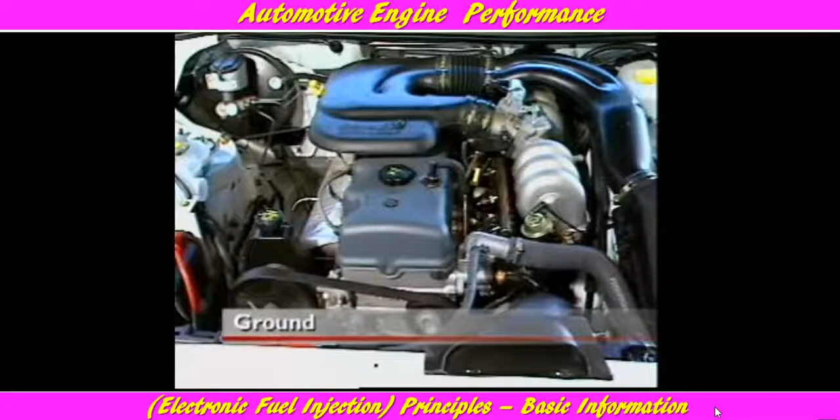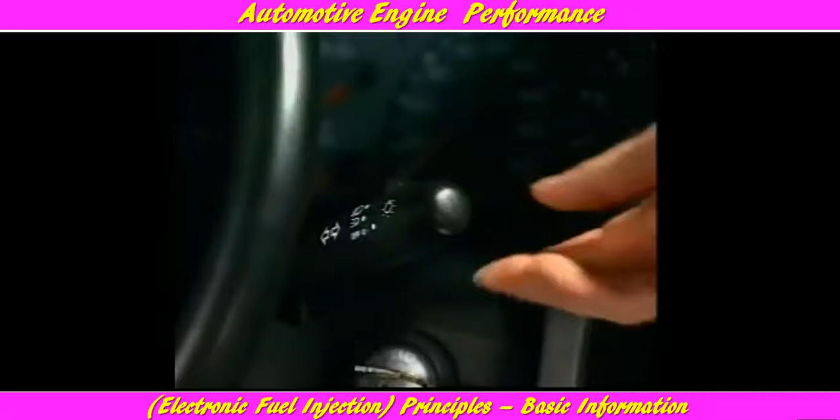Ground is a term used to indicate connecting a component to the vehicle frame or chassis. Current flows from the positive terminal of the battery through a controlling device such as a switch, then through the component. The return path is through the vehicle chassis or frame to complete the circuit and allow the component to operate. Using the vehicle frame in this way simplifies the circuit wiring.

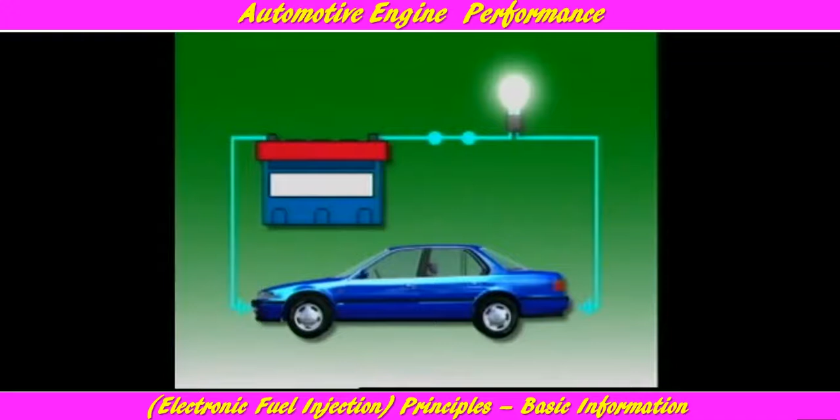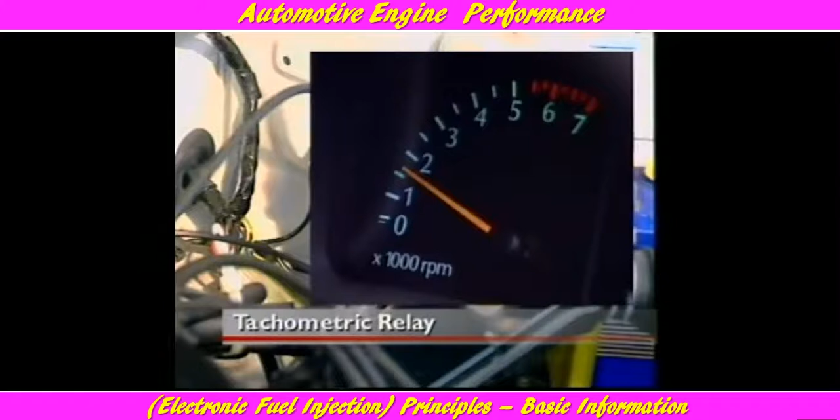A tachometer is used to indicate engine RPM. It is normally connected to the negative terminal of the ignition coil. The pulses from the ignition primary circuit are then used as an input to operate the tachometer. At idle speed, the frequency of the pulse is steady. As the engine speed rises, the frequency of the pulse increases as the tachometer indicates.

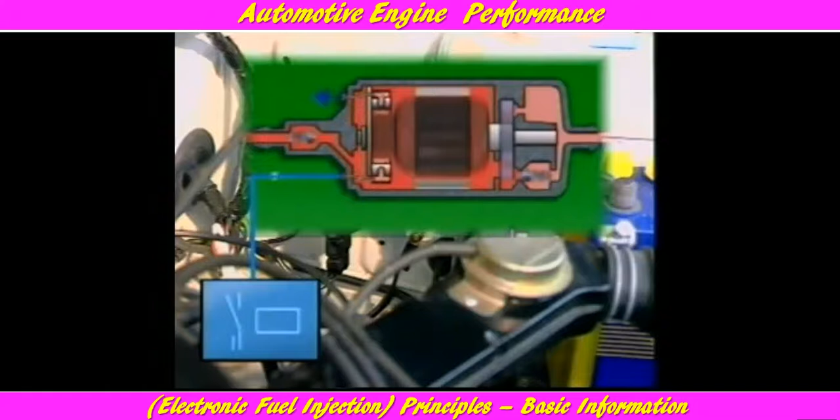A tachometric relay uses the same input from the negative side of the ignition coil to ensure the relay operates only when the engine speed is above a specified minimum, say 350 RPM. In this case, it operates as a safety device, ensuring the fuel pump operates only when the engine speed exceeds this figure.

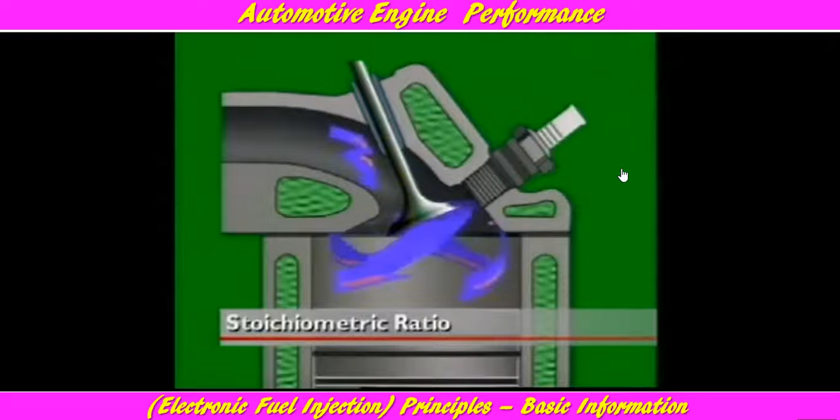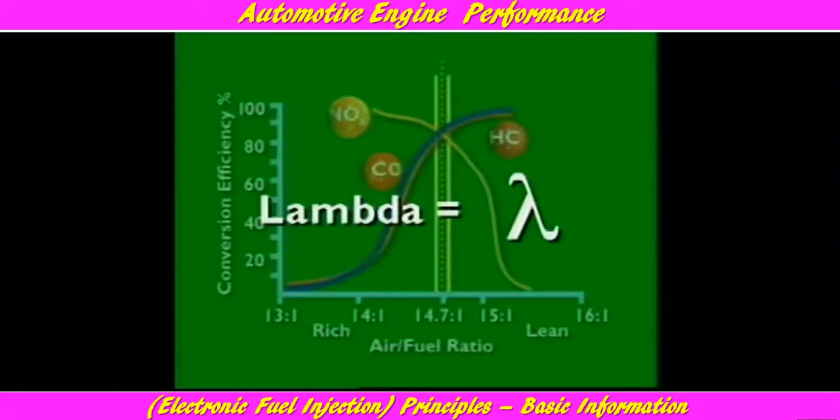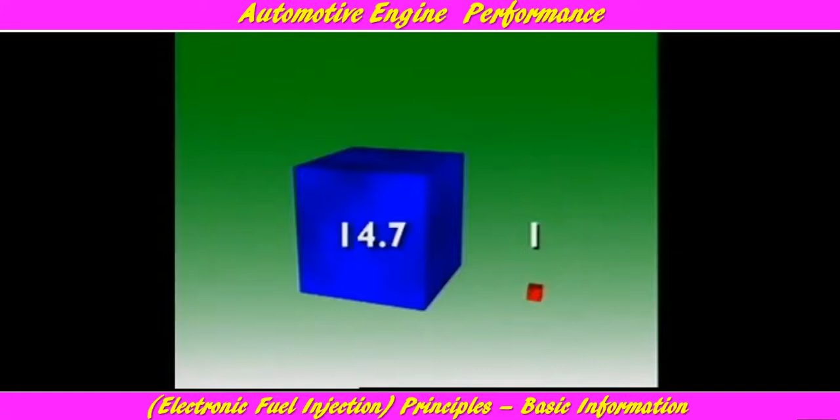The term stoichiometric ratio describes the chemically correct air-fuel ratio necessary to achieve complete combustion of the fuel. It is represented by the Greek letter lambda. The value of the ratio is 14.7 parts of air to 1 part of fuel. By mass, that's 14.7 kilograms of air to each kilogram of fuel. So if lambda equals 1, the air-fuel mixture is at the stoichiometric ratio of 14.7 to 1.

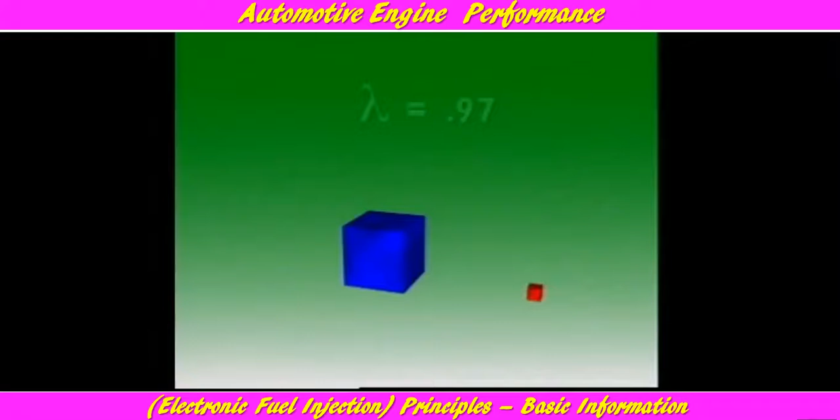If an air-fuel mixture has a higher figure, say 1.03, there is more air in proportion to the fuel than 14.7 to 1, and the mixture is slightly lean. A mixture with a lower lambda value has less air, proportionately, than fuel, and the mixture is slightly rich.

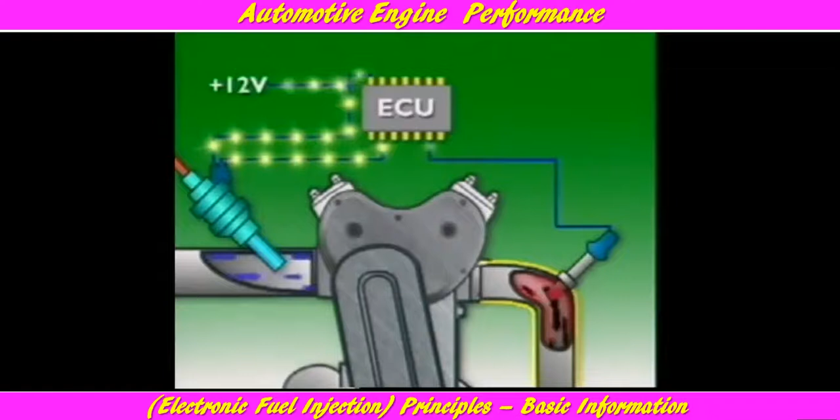The exhaust gas oxygen sensor is also called the lambda sensor, since it can be used to maintain the air-fuel ratio at lambda equal to 1, within very close limits. It can be installed in the exhaust manifold, where it measures the percentage of oxygen in the exhaust gases. A high percentage of oxygen may mean too little fuel is entering the engine, the mixture is too lean, and the lambda is greater than 1.

The sensor delivers this information to the ECU, which adjusts the mixture accordingly. Similarly, a low percentage of oxygen may indicate too much fuel is entering the engine, the mixture is too rich, and the lambda is less than 1.

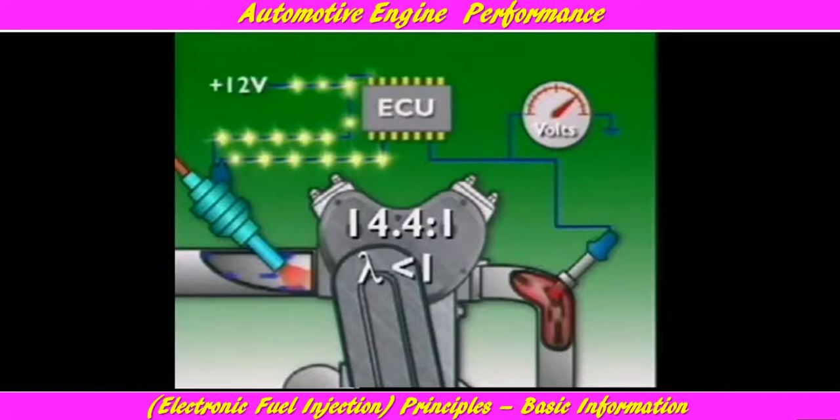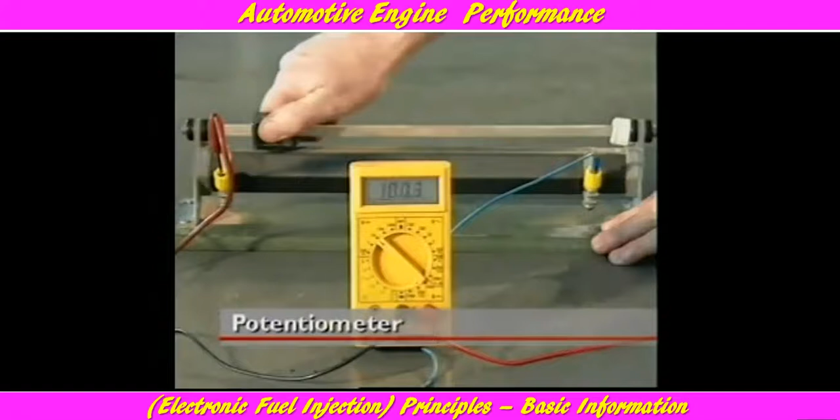A potentiometer is a mechanically variable resistor which, in EFI applications, is normally a film type. It can be linear or circular in construction and has 3 electrical connecting points. 2 are at the ends of the resistor and the third is attached to a center sliding contact, arranged to move across the resistor. A reference voltage is applied to the resistor so that a steady current flows through it.

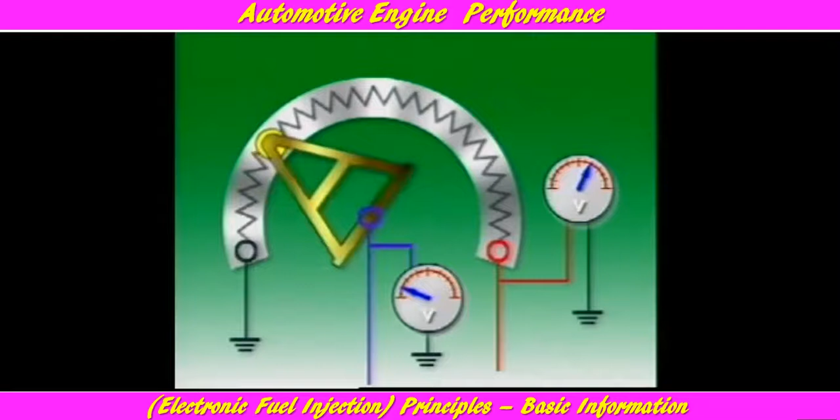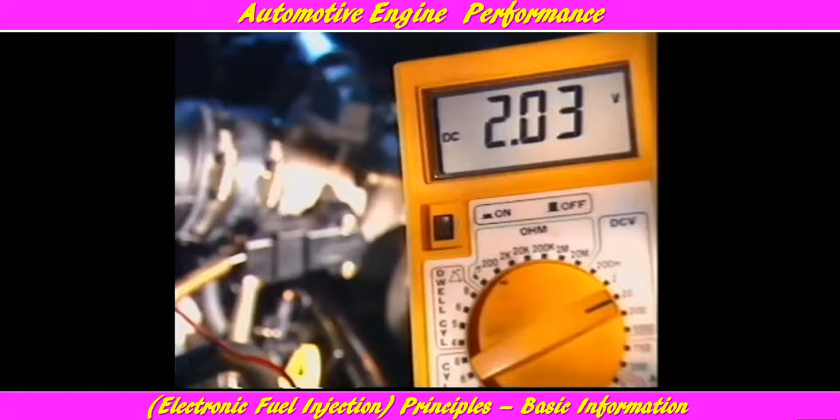As the center sliding contact moves across the resistor, it measures the voltage at the point it is in contact with, and provides a reference voltage for that position. In automotive applications, the circular form is commonly used as a throttle position sensor, with the center contact attached to the throttle plate. The throttle plate position can then be monitored by the control unit.

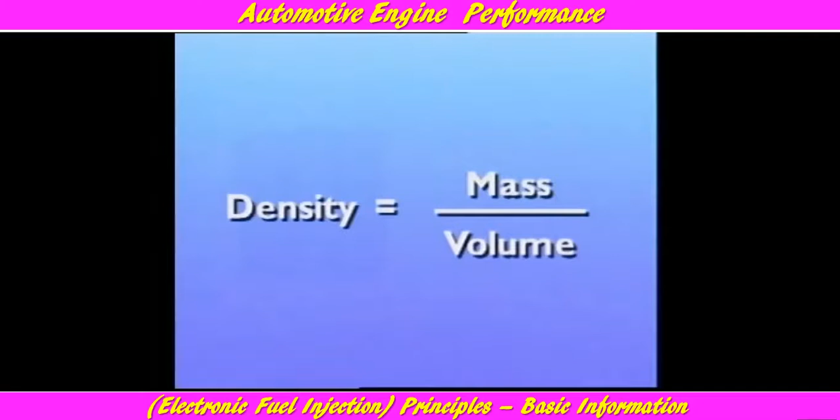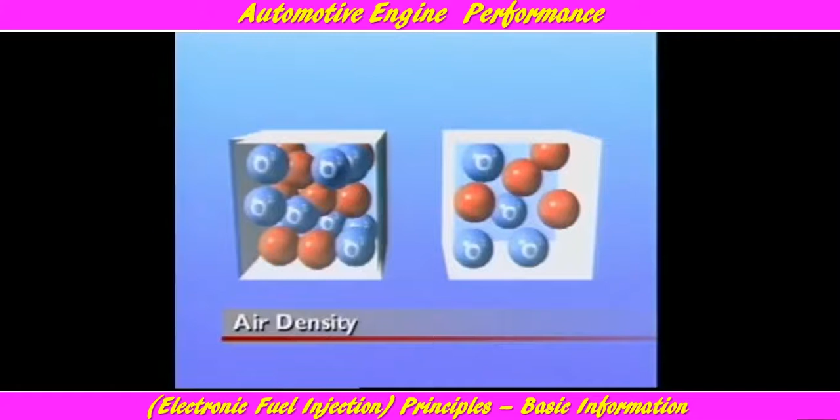The density of air is its mass per unit volume. This means a volume of air at high density has a higher mass than the same volume at low density. And if there is a larger mass of air, it will contain proportionally more oxygen.

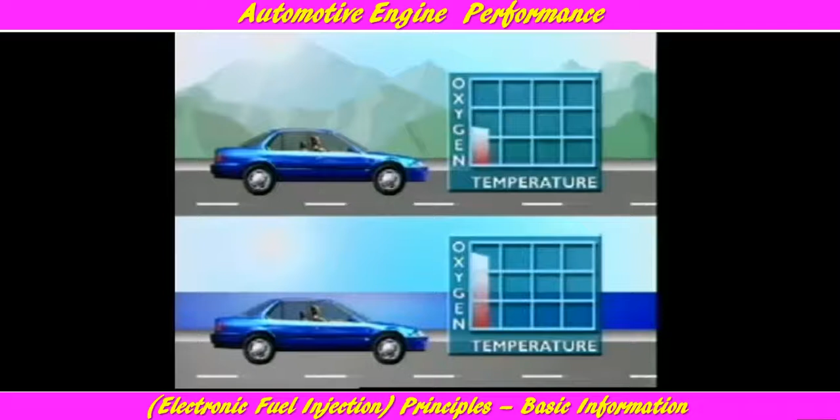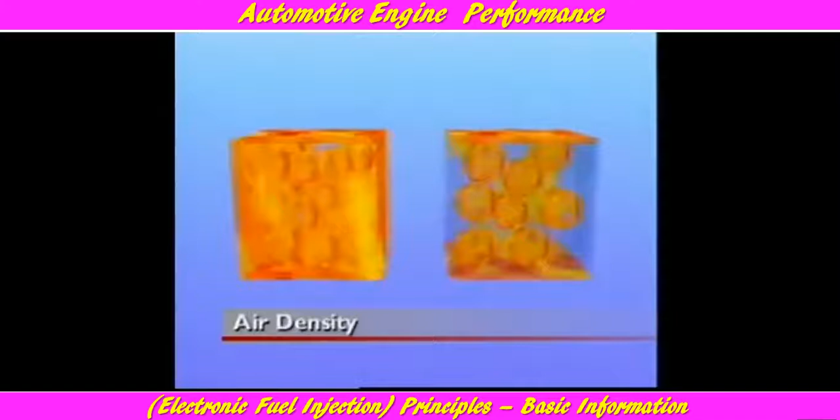The density of air in the atmosphere changes at different temperatures and altitudes. That means the air that enters an engine at different locations could have very different amounts of oxygen. The amount of oxygen in air directly affects how well it supports combustion, so it can be important in determining an air-fuel ratio for an engine.

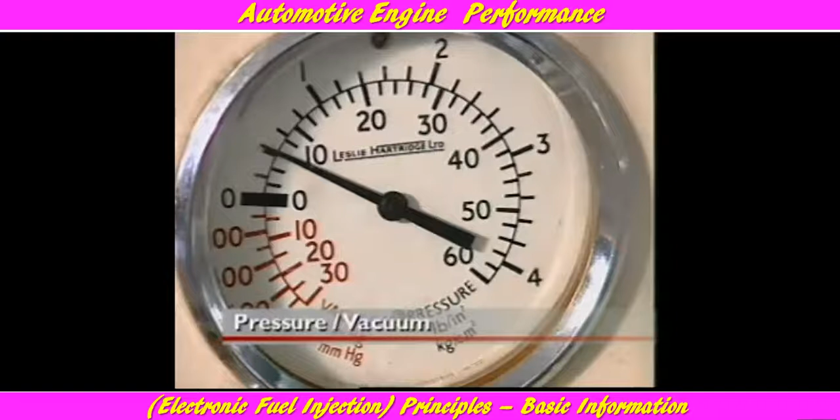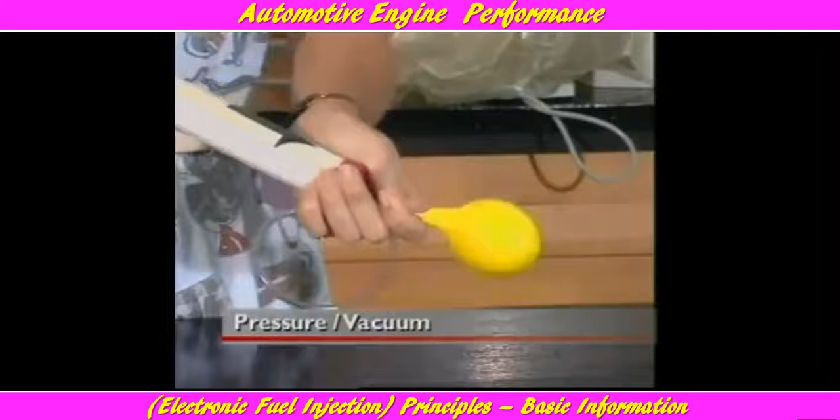Pressure and vacuum are terms in everyday use in the automotive industry. Manufacturers recommend a pressure to which tyres need to be inflated, and manifold vacuum is used to operate a brake booster. Gases exert pressure on all bodies they make contact with.

This applies also to the air in Earth's atmosphere. Air has mass, and as a result it exerts pressure, called atmospheric pressure, not only on the Earth's surface, but also on all objects on the Earth's surface. Atmospheric pressure varies with altitude, but at sea level it is calculated as 101.3 kilonewtons per square metre, or 101.3 kilopascals.

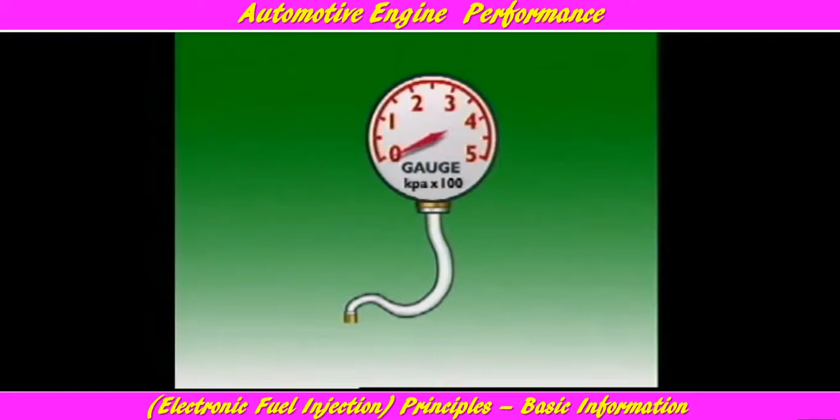But if this is so, why does a pressure gauge read 0 when it is not in use? This is because the gauge indicates pressure above atmospheric pressure only. This reading is called gauge pressure.

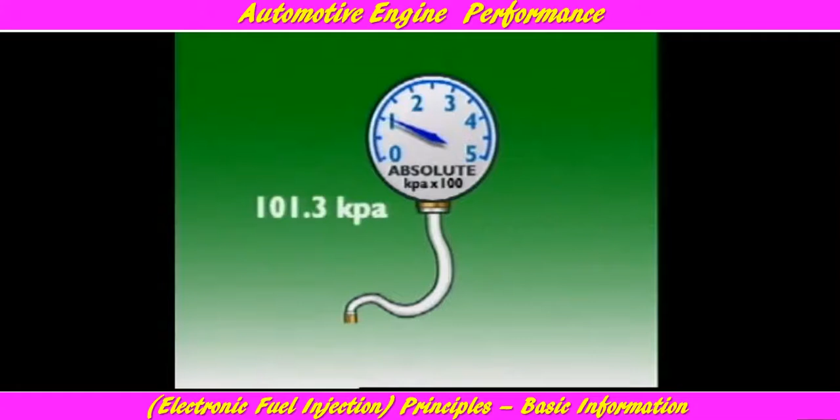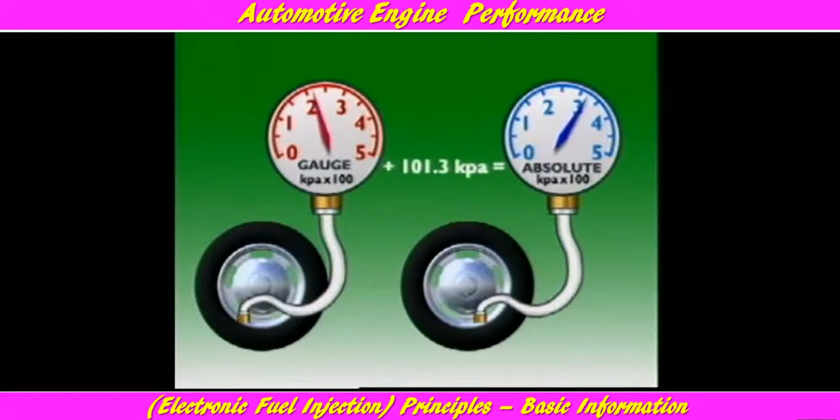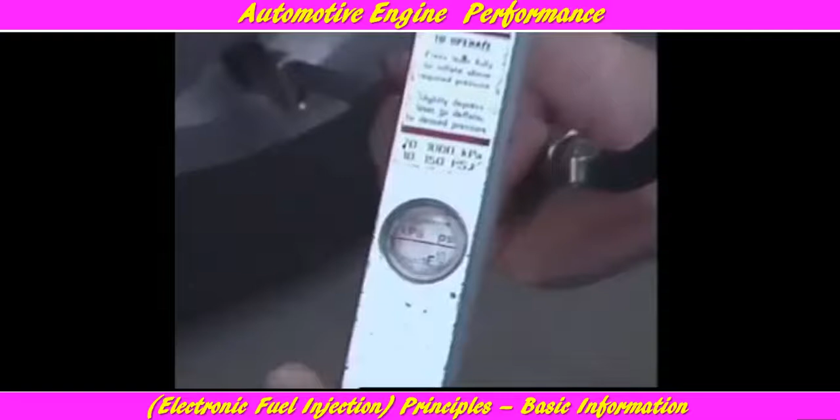If absolute pressure was needed, an absolute pressure gauge would be needed, and it would read 101.3 kilopascals when not in use. Absolute pressure equals gauge pressure plus atmospheric pressure. Readings on an oil pressure gauge or on a tyre gauge should really have 101.3 kilopascals added to them. It is normal practice, however, for the gauge reading alone to be taken as the accepted value.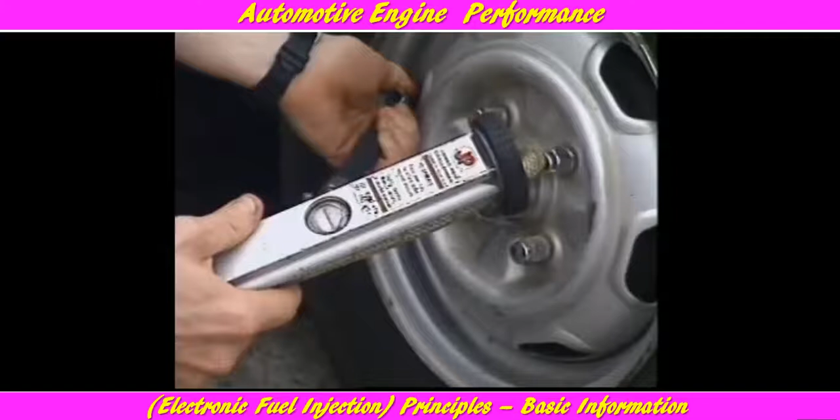If the pressure being measured is below atmospheric, a pressure gauge with its 0 reading is of no value. This is why, for pressures below atmospheric, as in a manifold vacuum or depression, a vacuum gauge is normally used.

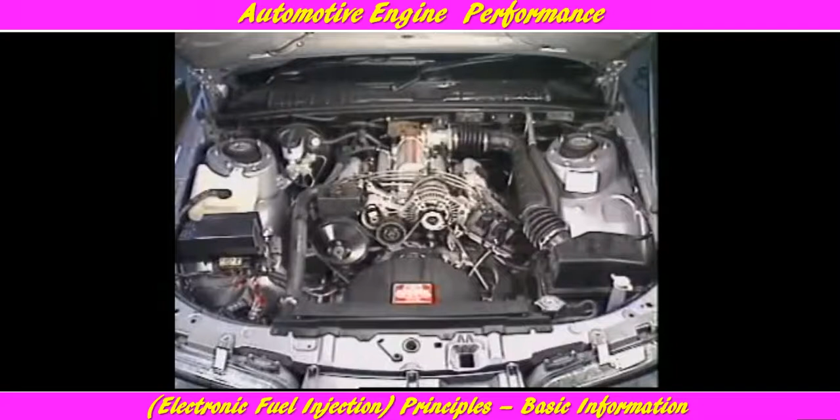In a petrol engine, the position of the throttle plate controls the volume of air, or air-fuel mixture, entering the manifold. At idle speed, the pistons draw air away from the manifold at a faster rate than it can pass the throttle plate into the manifold.

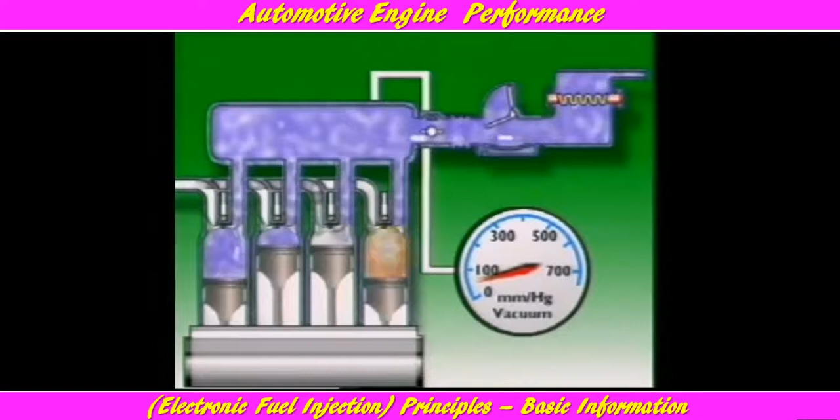A high vacuum or a depression exists. At wide open throttle, depending on load, the vacuum is much less, and pressure in the manifold rises, closer to atmospheric. A vacuum gauge can be calibrated in millimeters of mercury, and the scale reads from 0 to 760.

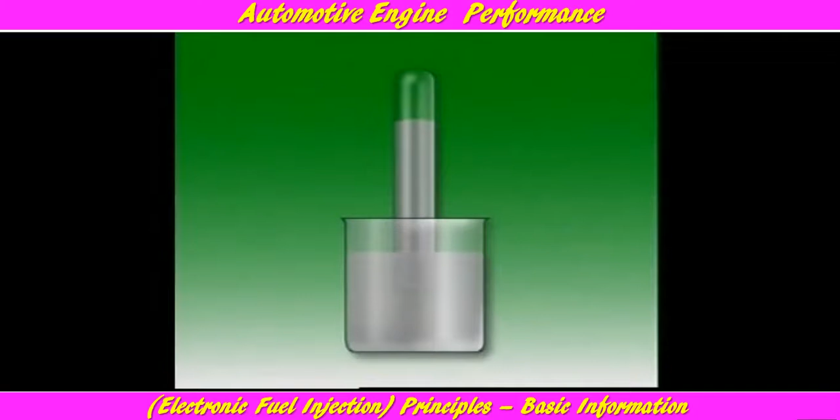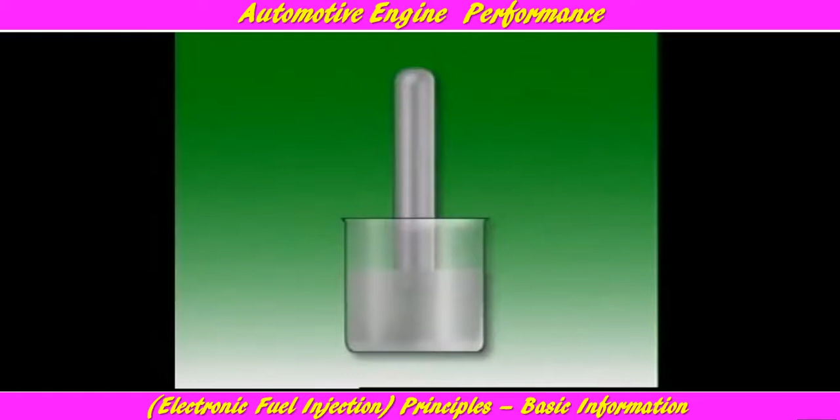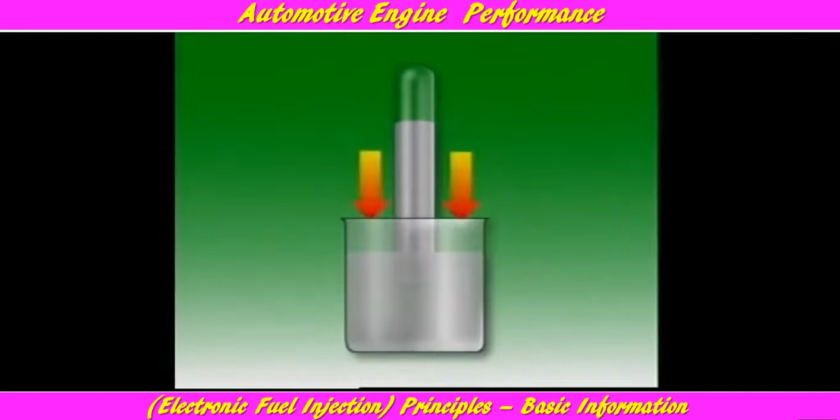The scale is derived from the fact that atmospheric pressure supports a column of mercury 760 millimeters high. This glass tube, closed at one end, is filled with mercury, then inverted in a bowl of mercury. The column of mercury in the tube falls to about 760 millimeters. The space above the mercury is a vacuum, and the atmospheric pressure on the exposed surface of the mercury supports the column.

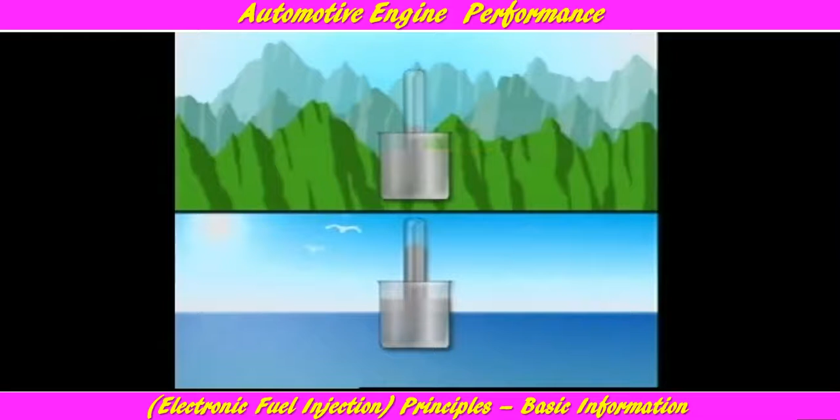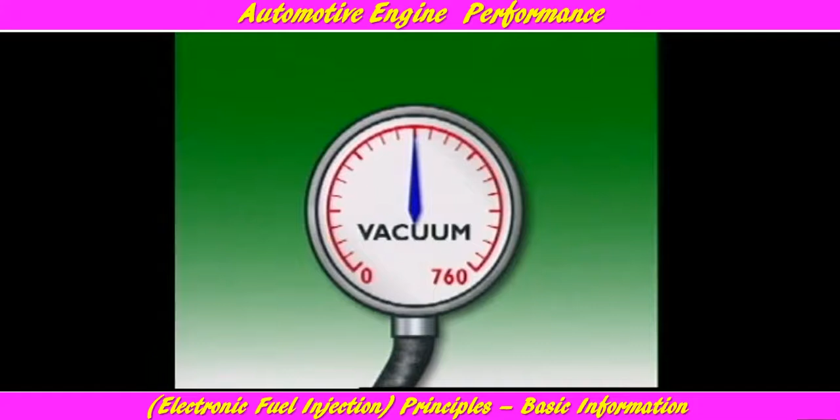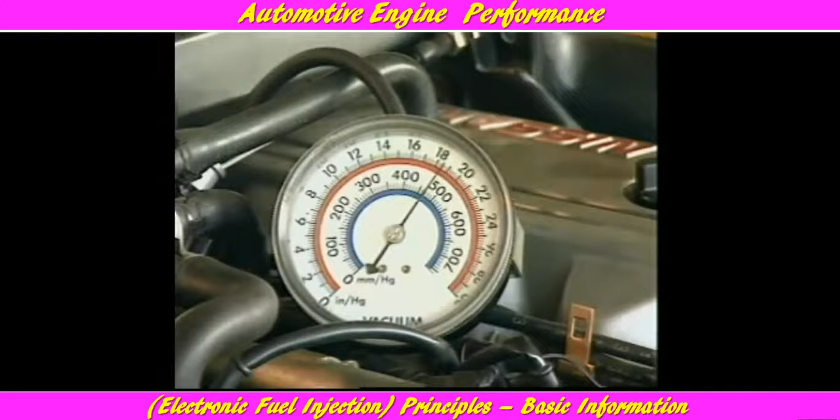At sea level, atmospheric pressure supports a column of mercury 760 millimeters. But at higher altitude, its height falls, which indicates that atmospheric pressure at that altitude is less. A scale of 0 to 760 millimeters can thus be used to indicate the degree of vacuum or depression that exists below atmospheric pressure. At idle speeds, a vacuum gauge connected to the intake manifold will indicate a reading of approximately 450 to 500 millimeters of mercury, depending on altitude.

Some engine management systems signal changes in atmospheric pressure by using a barometric pressure sensor in the ECU. This is because, above sea level, air pressure is reduced. So to maintain correct air-fuel ratio, a vehicle has to reduce the amount of fuel delivered to the engine.

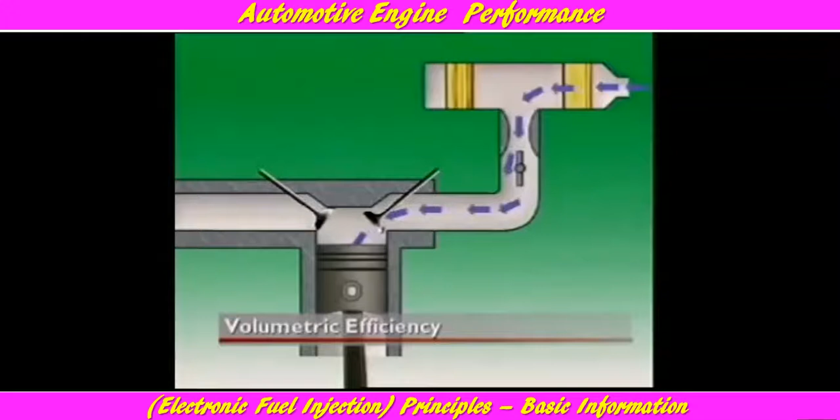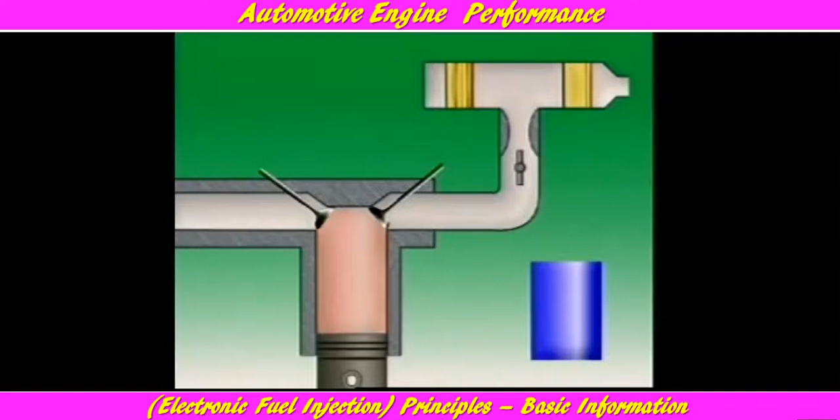Volumetric efficiency compares the volume of air entering a cylinder during intake to the internal volume of the cylinder when the piston is at bottom dead center. It is usually expressed as a percentage. In a naturally aspirated engine, one without forced induction, volumetric efficiency can never be 100%. This is because of the resistance to the airflow that occurs at the carburetor, manifold, and the intake valve.

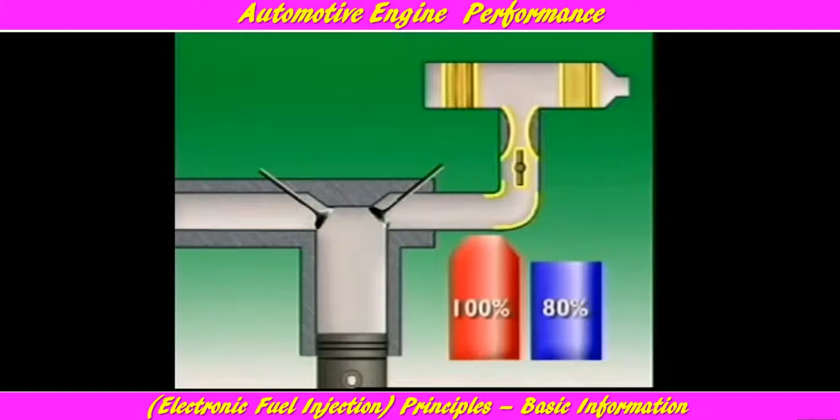With forced induction, the incoming air is compressed so that a greater volume and mass of air is forced into the cylinder during the intake stroke. That takes the volumetric efficiency to above 100%.